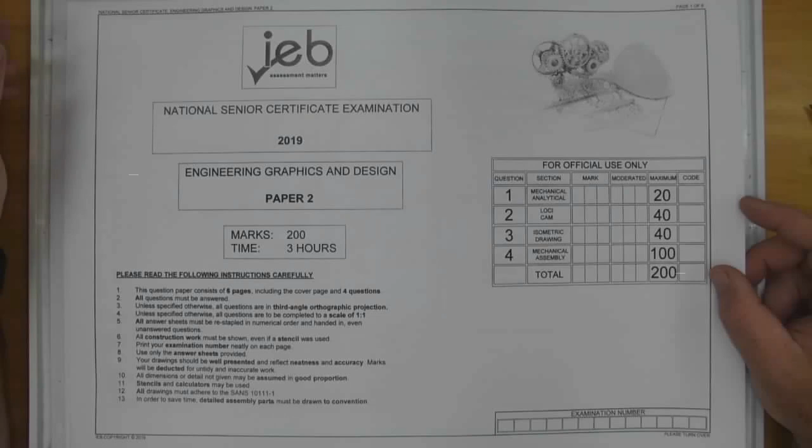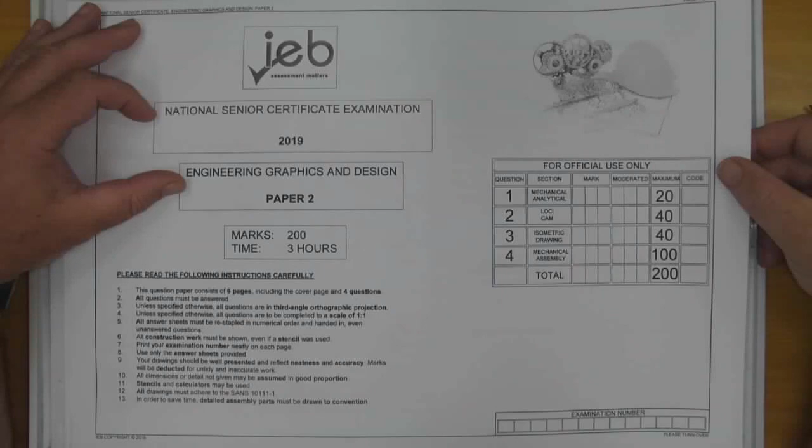Today I'm looking at 2019 IEB paper 2, and I'm going to be looking at the isometric drawing today. With the isometric drawings in 2018, the isometric drawing was a half section, meaning a quarter of the shape was cut away. In 2019, if we take a look at the shape here, we've got a full section.

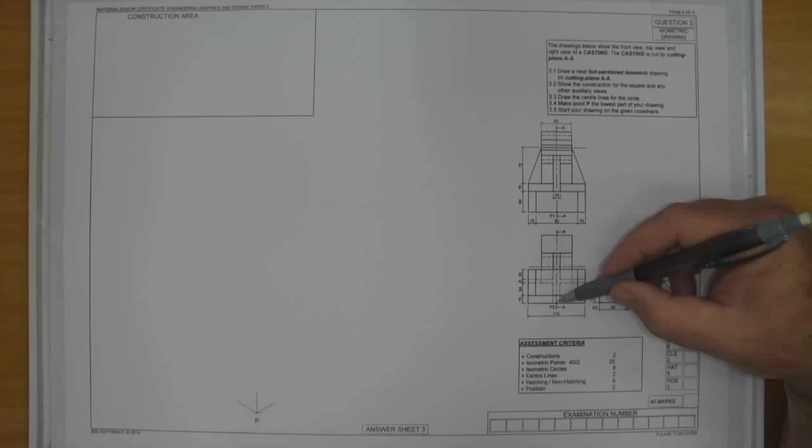What they were doing was alternating and testing your sectioning ability. So over here, if they did a full section in isometric, they alternated in the mechanical assembly, and then they did a half section in the mechanical assembly.

So an important aspect of a mechanical drawing is to be able to do sectional views. It's something that has come up with the new examiner, so it's a full sectioned isometric view. Spend a moment going through the information here, and we'll get started shortly with the constructions.

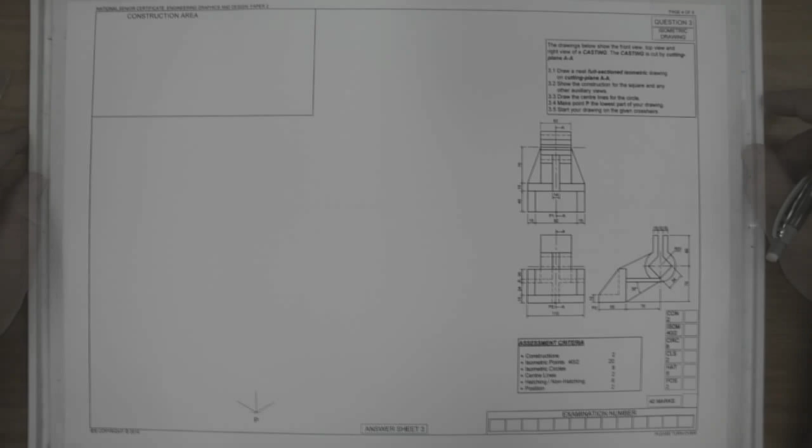The first thing that I like to start with is to get some marks on the board, and for me that's to draw the constructions. In your instructions they've said you've got to show the construction of the square and any other auxiliaries. You're going to probably need to do this one here as well, where we've got this little rib at the bottom of the shape. So that's my first thing.

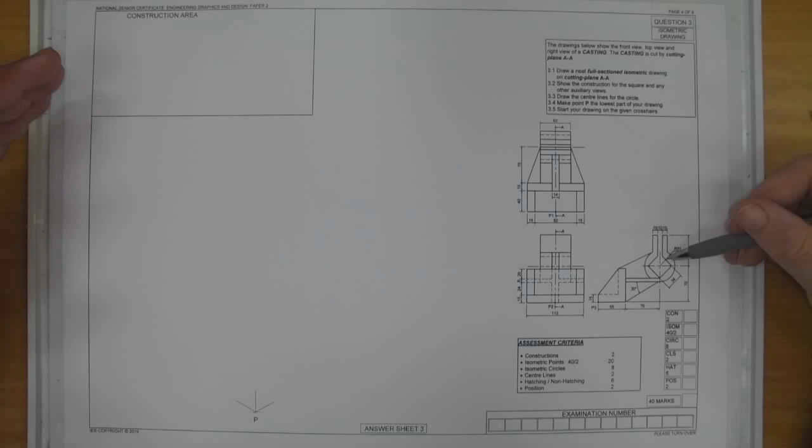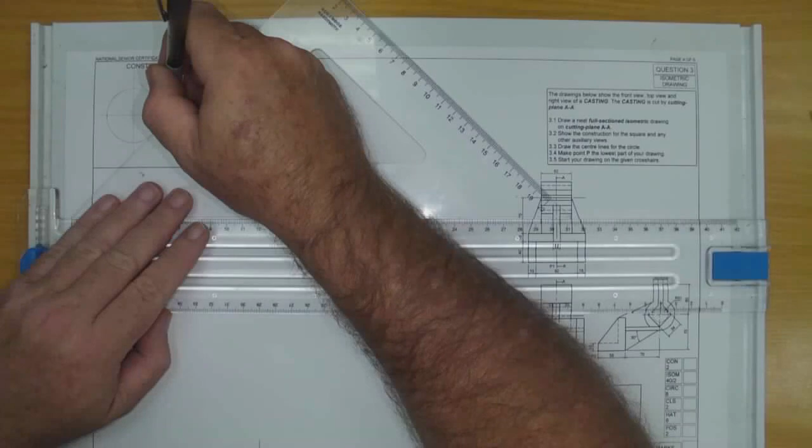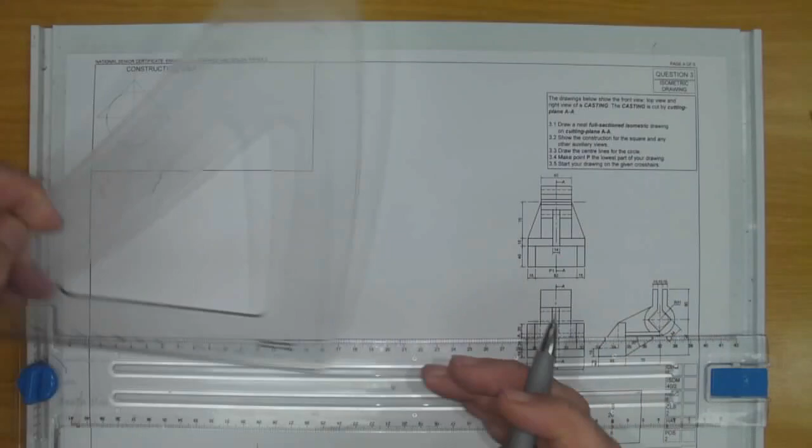They tell me that the square has a distance between the sides of 34. Now you could draw this as a flat square and get the same shape, but generally what happens is if you're going to do this construction, we draw a circle that touches the inside of that. So we'd start by drawing the circle with a radius of 17, diameter of 34, and they've given us this construction area to do that. I'm going to draw that circle with a radius of 17. Here's my circle with that radius, and all I'm going to now do is draw in my diagonals. And there is that construction.

In order to find this height over here, I need to construct this. Well, they've actually given it to me there, so I actually don't think I need to do that construction.

So I'm now ready to start my shape. Now, as we get going, let's remember the following please, that your time allocation needs to be 35 minutes to complete this drawing. Don't spend too much longer than that on this, otherwise you're going to be losing out on time to complete your other drawings.

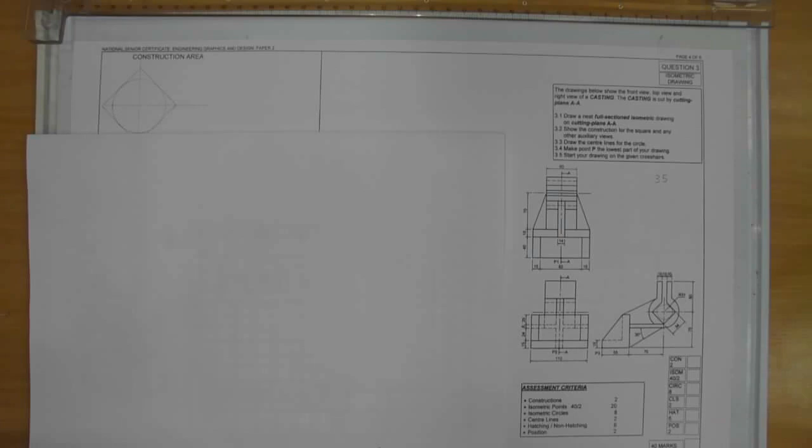A nice thing to do before you get started though would be to make a little sketch, give you an idea of what you think this shape will look like before you get drawing.

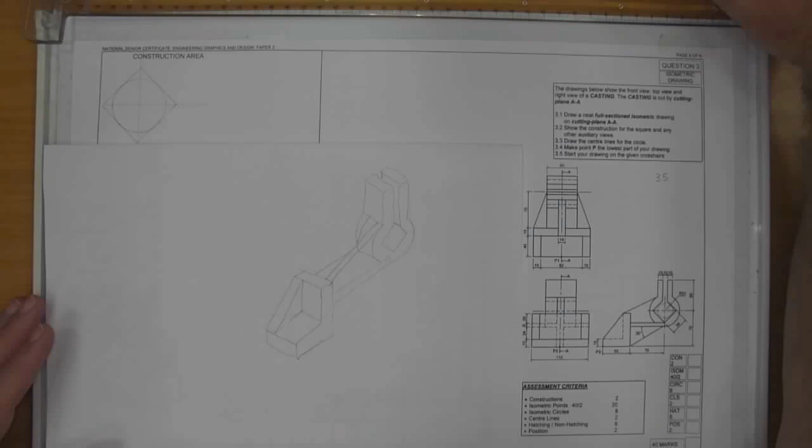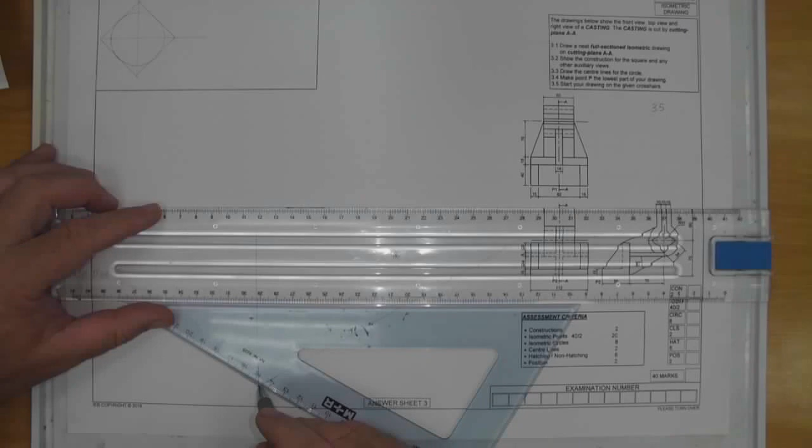The first thing that I like to do on my drawing is to draw an isometric axis and position the start of my shape. They have given us the start point of P, which is at this point over here.

Now, if we're going to mark off our shape, I'm going to look at maybe going and getting this little L shape and then across to where this horizontal little shape goes through there. So I'm going to look at marking off those measurements to start. It's always worthwhile and helps your speed if you could mark off a couple of measurements at the same time. So that was the 55, now I'm marking off the 70. Again, let's try and be accurate with your measurements.

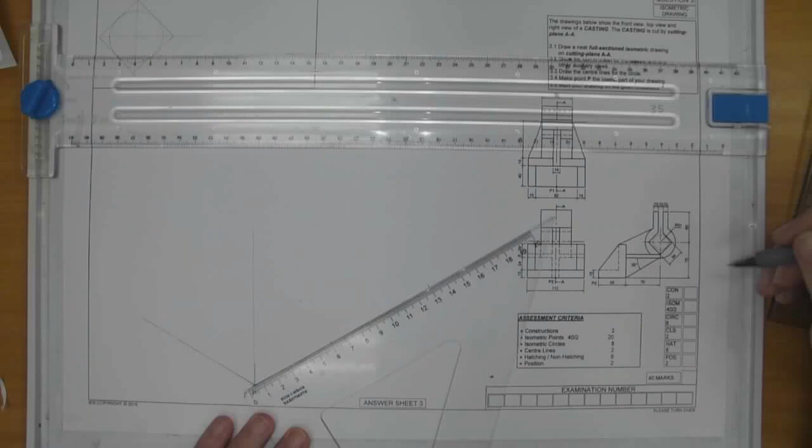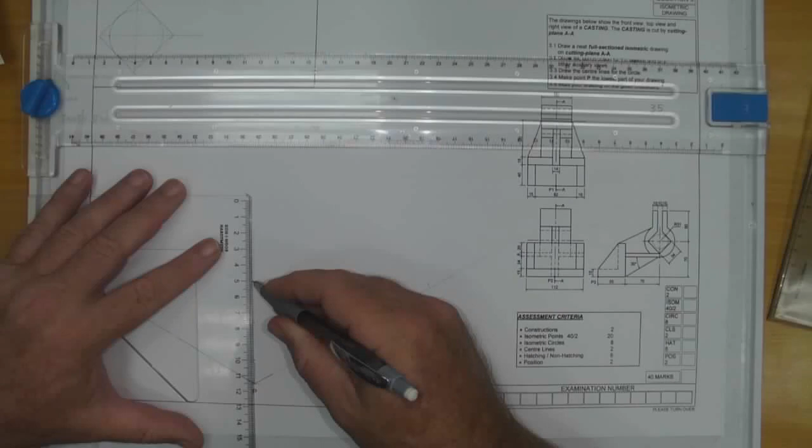Okay, the height measurements I'm looking for here: there's a 15, a 24, a 6, and a 20. So we can mark all those off. So there's my 15, and 24, and 6, and 20. So always try and mark off a few different measurements at the same time. Really helps you with your speed instead of marking off one measurement at a time.

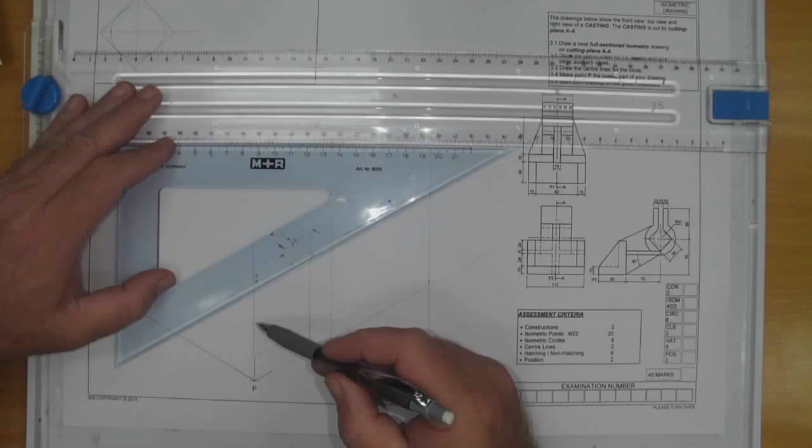These should all be construction lines, your light line, because we don't know what's going to become permanent and what's going to become hidden detail. So very important, your line quality here in your isometric drawing.

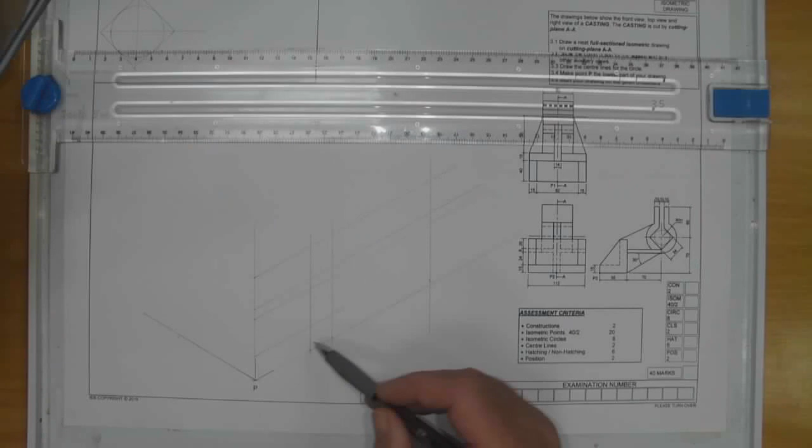So here I can see that little L shape that I've got, and here is this part coming across to the center of where my circle is going to be.

Now if we mark off some measurements, at this point I need the radius, which is 31. Now 31 is quite a random measurement, and the point is they're trying to see if you're able to measure random distances. So please be aware of that.

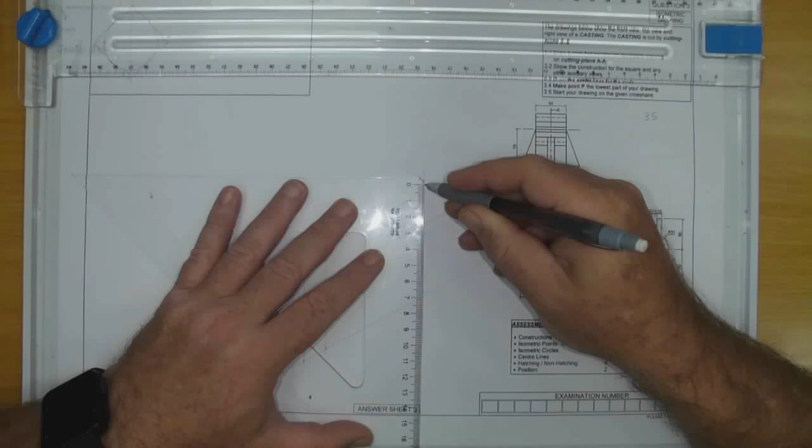They're trying to test your skill of using a ruler correctly. So there's my distance of 31, and I'm going to go up another radius of 31, which gives me the top of my circle. I'm only going to use that later for my square.

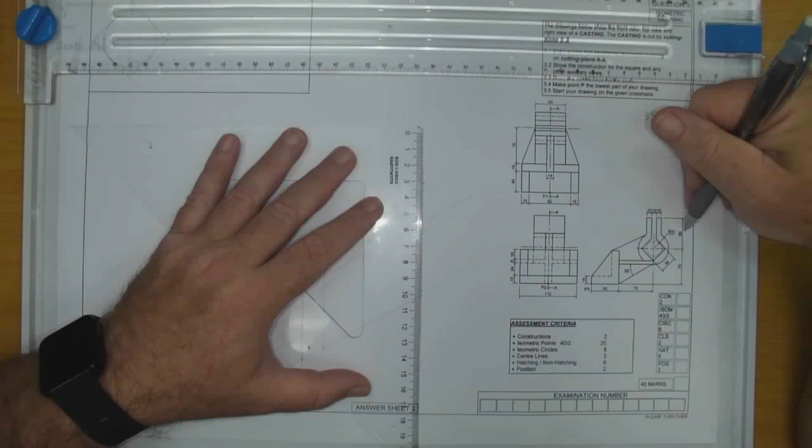They tell me that from that center point it's going to go up a distance of 60. So what I want to do is mark off that distance of 60, which is where I can draw these two little forks at the top.

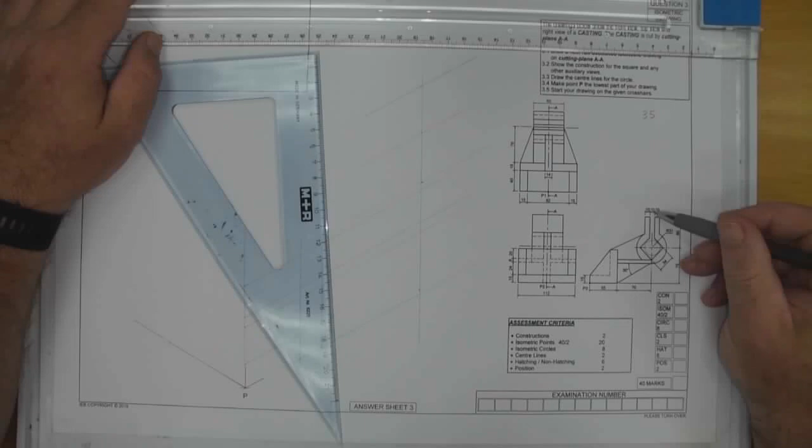Now for these forks, they're telling me that distance is 10 in the middle and 10 on either side. Now if I've got the center here, I'm obviously going to need to mark off 5 on either side, and then a measurement of 10.

Okay, so we've got a few things coming together here, let's go for our circle construction next. For my circle construction, there is the center, that distance of 31 and 31 up, and I've marked off 31 on either side, creating that square.

When I look at the shape now, I look at the distance between the midpoints, and I can tell that this distance here is bigger than that distance, meaning I must draw a big radius arc here and the same on that side.

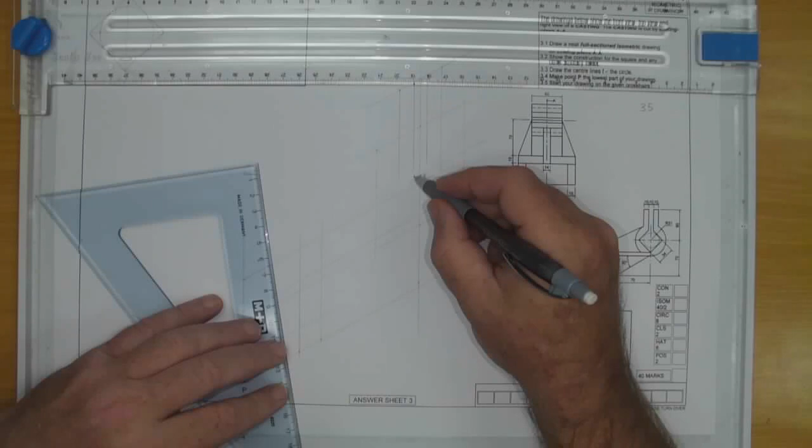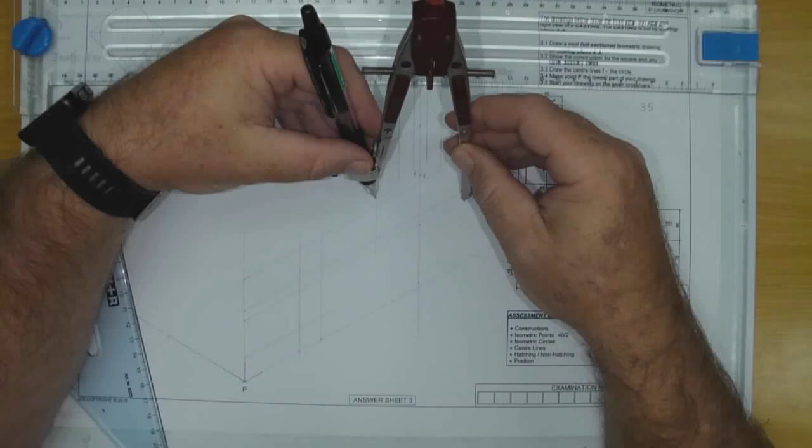So I take my compass, put it in this corner, extend it to the midpoint, check that it's touching both sides, and there's that arc there. Flip my compass around, put it on the other side, again check that it's touching. And there's the big arc.

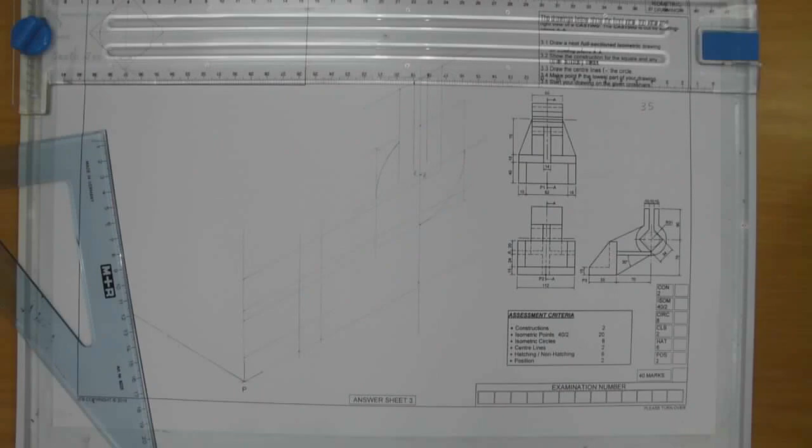To find the small arc, I draw in the diagonal in the small quadrants, and my test for accuracy is that it's going to run through the center of my shape.

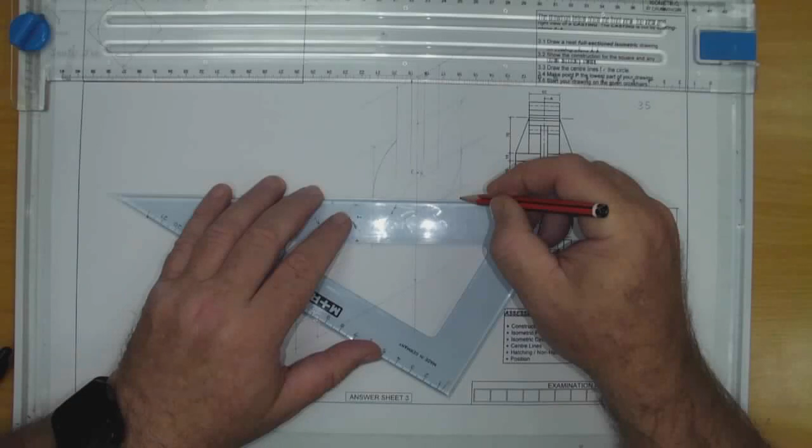Take one of your big arcs and draw it in. So in other words, that's where I put my compass, that's where I extended it to the midpoint, so there I draw that in. There at the intersection gives me this point.

Do the same on the other side, from the center to the midpoint on that side. Where it hits there is the other one. Now this is a small radius, so I stay in this quadrant, put my compass there, extend that, and draw my small arc.

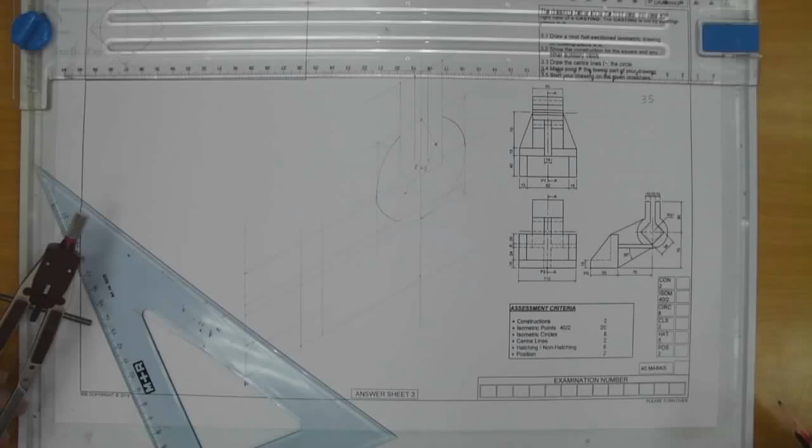So there's that arc at the moment. I'm going to just darken up some of the lines so that I've got an idea of what's happening.

So generally what I like to do is draw my lines in at the same time. These were vertical lines, so I'm going to try and put in as many vertical lines as I can at this stage. I'm not going all the way with this because I haven't worked out where that's going to finish just yet.

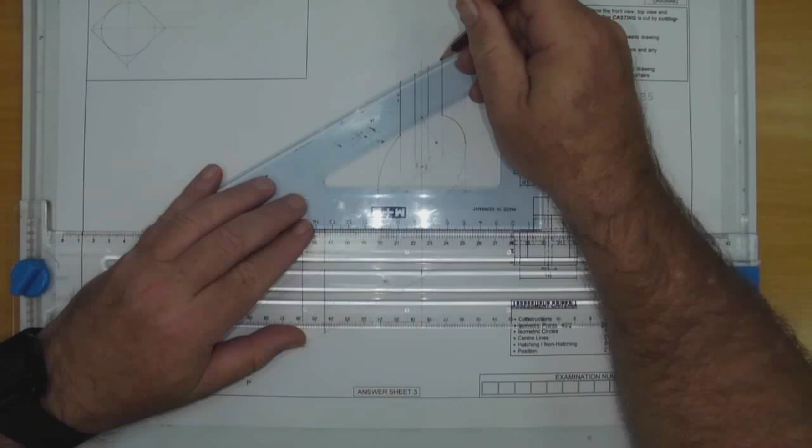There's some of my points. Now I'll do some of my 30-degree lines, again just trying to move down my shape and find the points that I can so long.

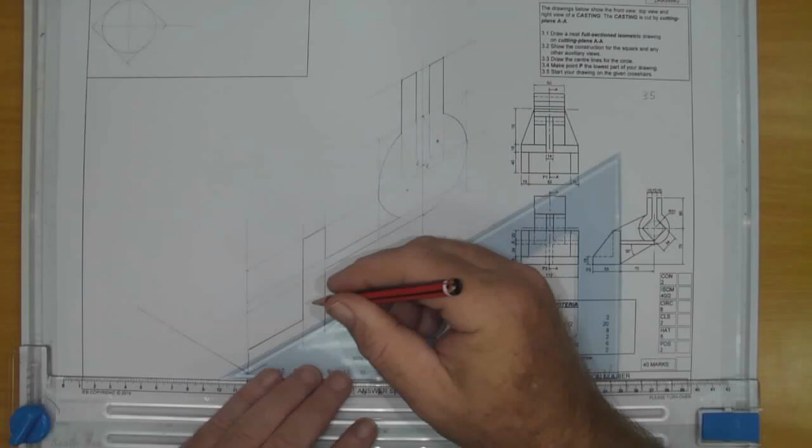Now, at the bottom of this shape, we've got that rib here at the bottom, and the start point of the rib is here, and it finished there, so we could just join this one up at the moment as well.

And so there's some of my shape. Now let's start working off the width dimensions.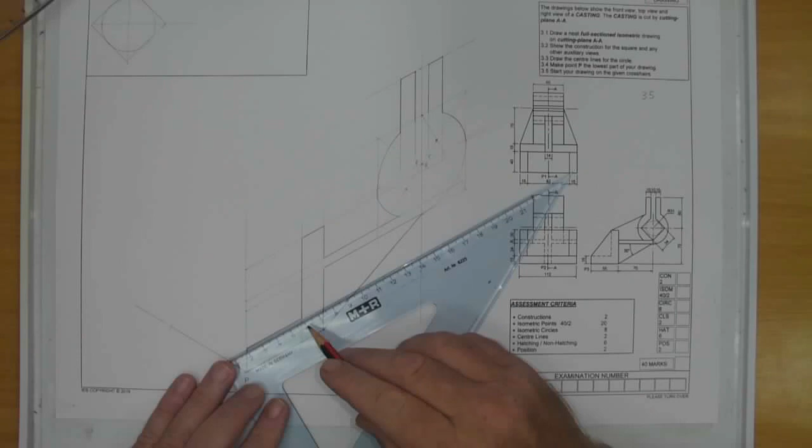It's worthwhile to take a pause in your drawing and check your measurements again. That distance was 40, that distance is 15, I'm happy with that. This distance was 70, yeah, 70. So these distances were 10, 10, 10. Just spend a few seconds rechecking your measurements.

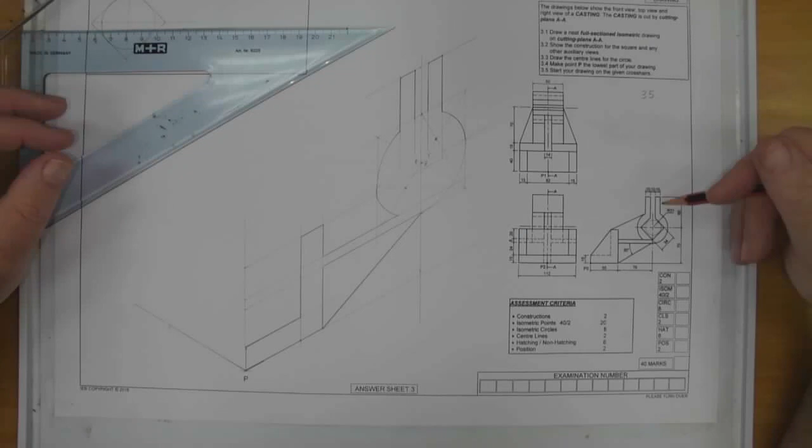To see that they match up with what you've got in your drawing, I'm now going to start projecting my lines across to get my width dimensions. There, I have projected my width dimensions. I know at the top of the shape here I need half of 60, so I need to mark off a distance of 30. And there is my distance of 30. For this part, it's half of 112, so that's 56.

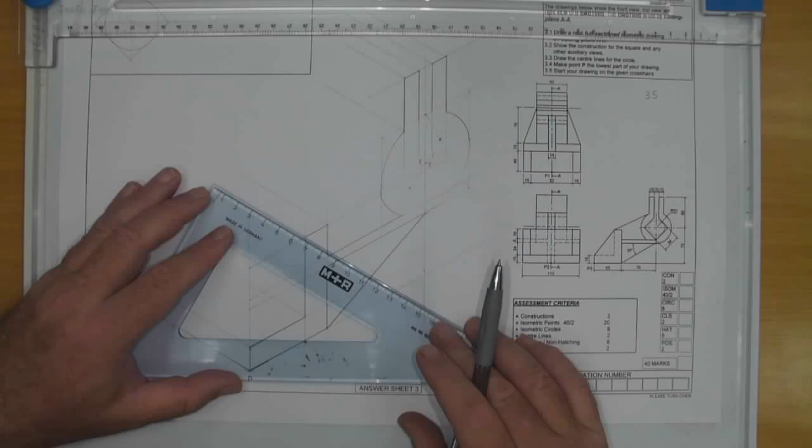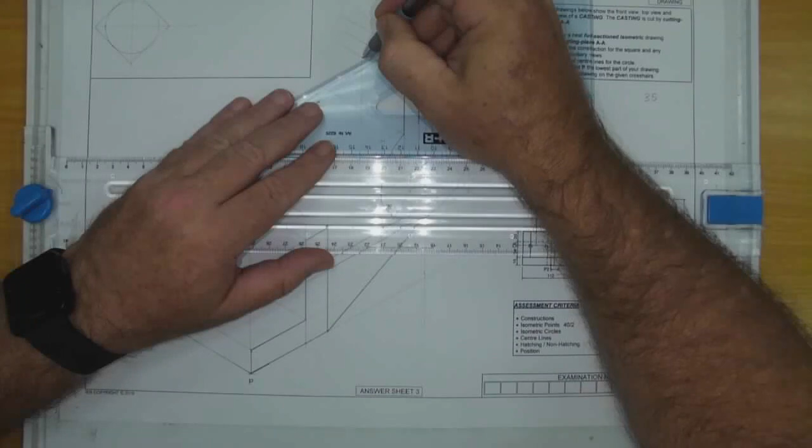Again, a random distance, because they want to see if you're able to measure accurately. Now what I've done is I've just picked a point here and I'm going to project to get the other ones the same over there. Because that's the edge, I'm projecting and projecting. Okay, I cheated on that one. Draw it in.

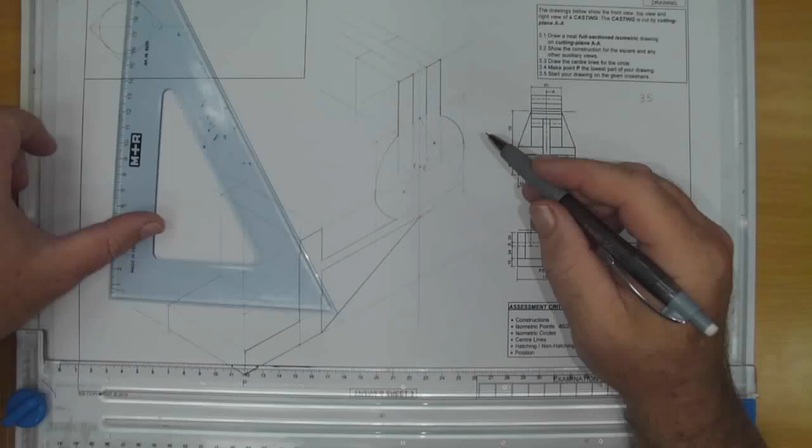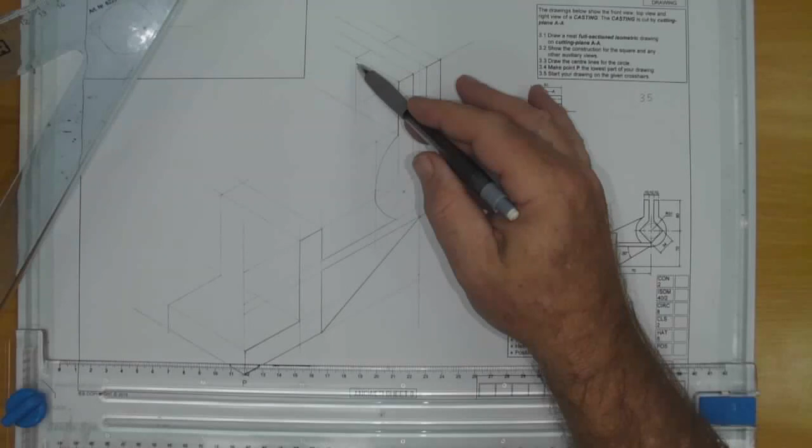So by projecting, I'm able to find where the edges are of the shape. Now you'll notice that I haven't put in my square just yet. I'm leaving it for the end. I'm trying to make sure I can get the easy marks by finding just the edges of these, which I think are easier than working out where your square is going to be in this shape. That's the only reason I haven't done my square. I'm trying to get the marks for these points which are easier to find.

Okay, I'm going to put in this rib on this side. So here is this edge coming down. And then we can join up the start point to the end point, and that is that edge of that rib there. And again, I'm just darkening up my lines a little bit now, to see what is visible.

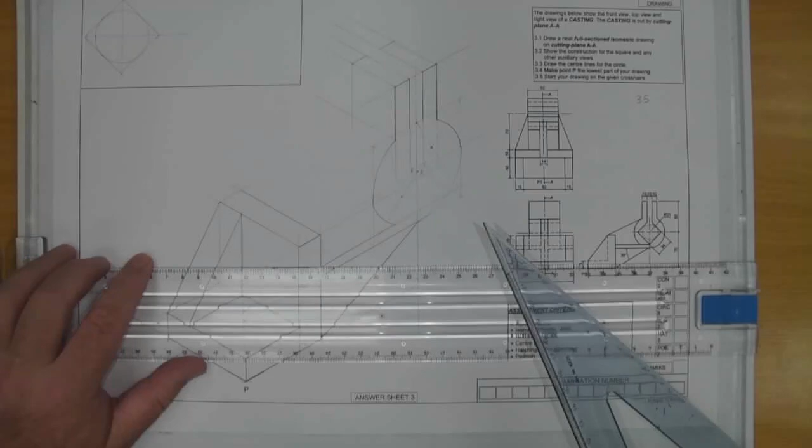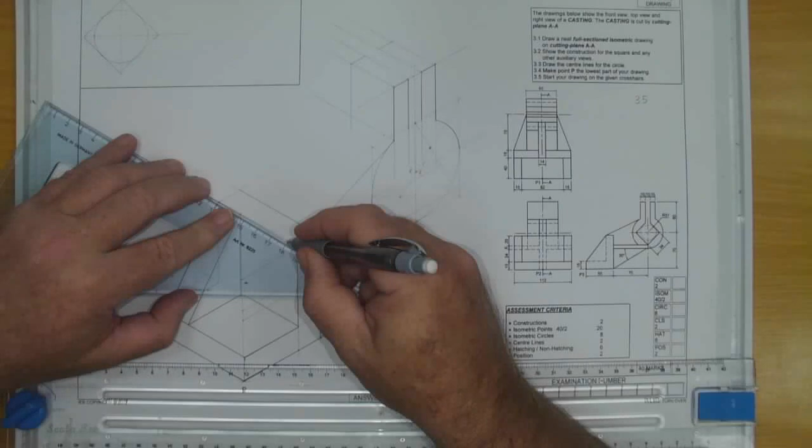Now on this side we've got that little rib coming around, so we're trying to find the tangent that goes from this point here to that edge there. And there is that little aspect there. Now this rib has got a thickness of 14, again a bit of a random number. I'm marking off 7 from that point, and I'm going to mark off 7 on this side, and that's going to give me this edge for that rib.

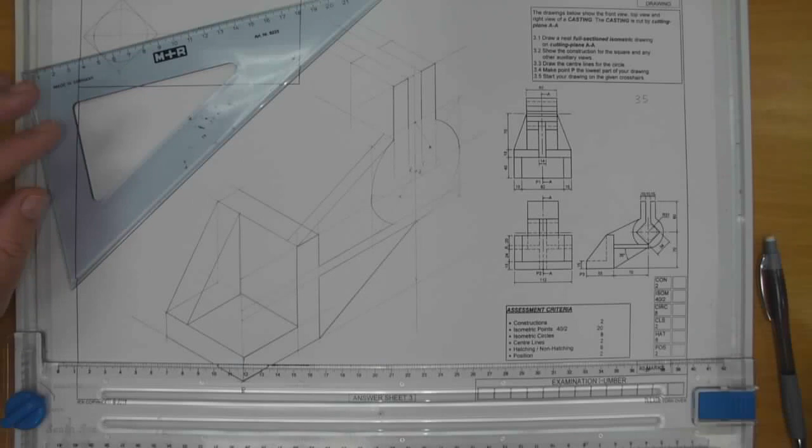So what's left for me to do is find where the back end of this shape is, and then let's put in that square. I'm going to find this back end of this corner now. Remember, this part sticking out there was this narrow part, so it's not the same thickness. It is tapering, so here is wide up against this shape, and it then narrows to come and touch where it is that distance at the point here.

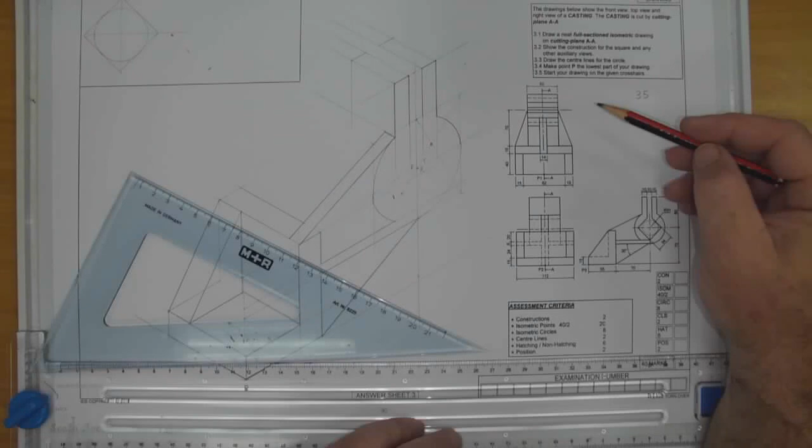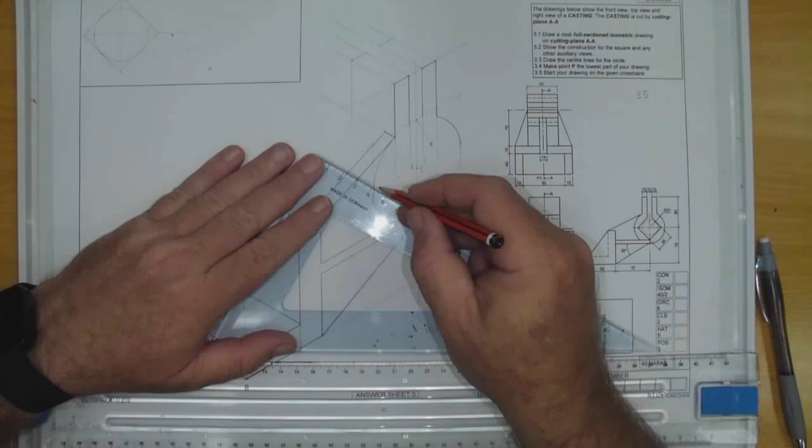So what we can do is the following. We know that it's going to be touching in line with the center here. So here was the center. I'm going to just extend that line back. And I need to mark off half of 60. There was my distance of 30, just where the circle is.

On this side, we're going to extend this edge where our distance was half of 112, so 56. And there was that point there. So if we're looking at the point, it's going to be going from here to this edge here. And that's that little aspect that we're going to see there.

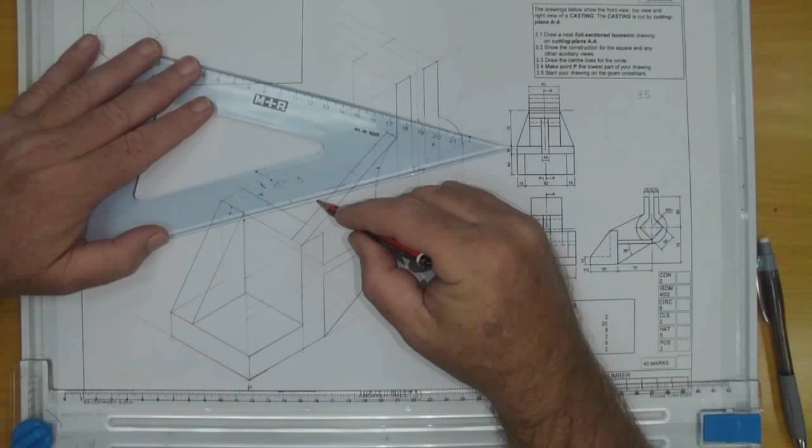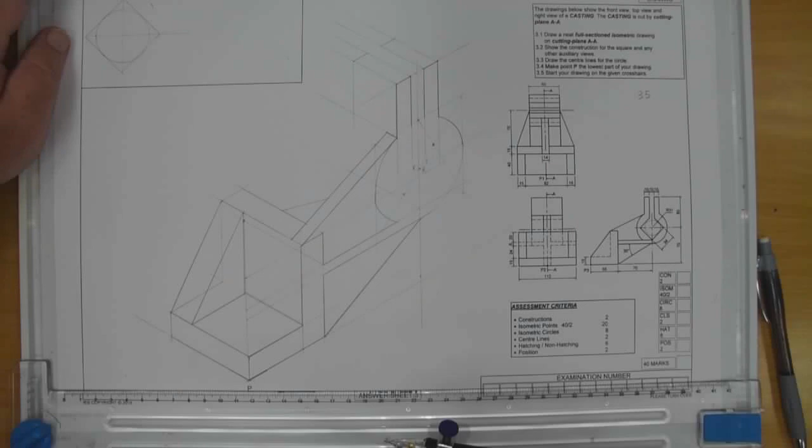Okay, let's get our square put in. So what I'm going to do is I've got a center line here. I'm going to be using that same measurement of that center line. So what I'm going to do here is take the distance from the center to the point, which should be all on the same point because it's a square.

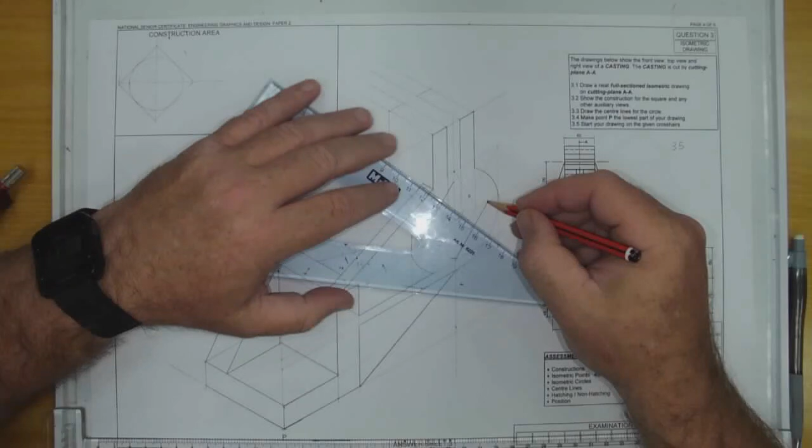I come and put it in the center of my shape here, mark off on my 30-degree and my vertical line, and that's going to give me my points for that square. Join them up. Now again, these sides should be parallel. If they're not parallel, check please, you might have a problem.

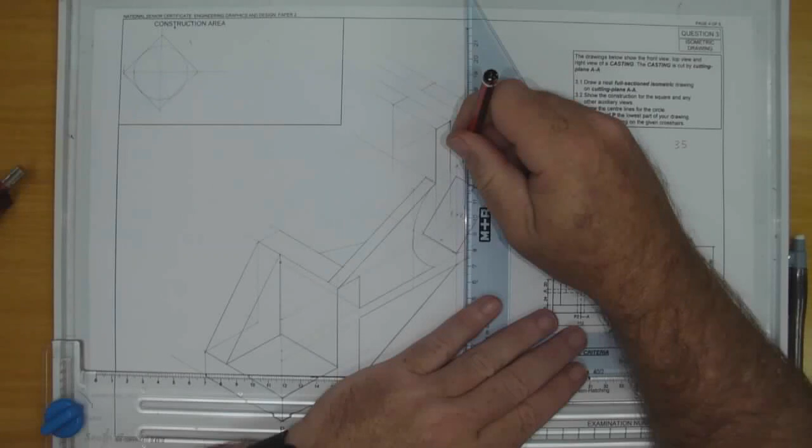Now that should fall on the 30-degree line, so we're not going to see any other points going in. I shouldn't have drawn that line all the way there because it's going to stop at the extension of this line. Let me just fix that up there. And so there are those points. This edge we will see because it's open, the window, so that'll extend like that. Let's put in these edges here.

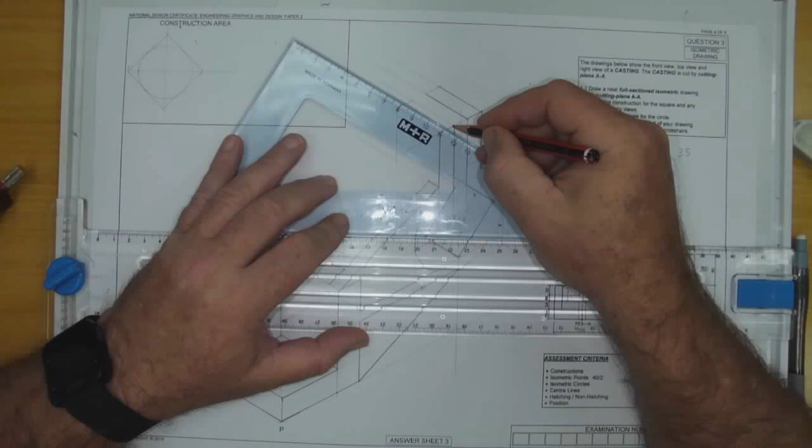Again, this is open, so I'm going to see a little window, which is going to give me this little edge here.

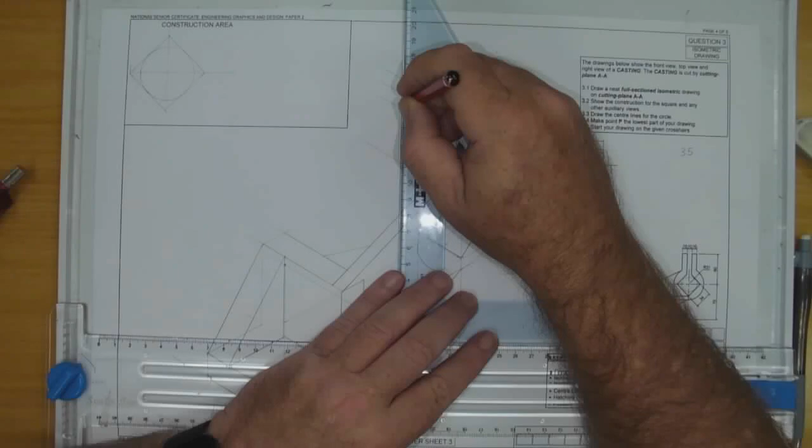Now what I need to try and find is this little arc at the back here. I know the center point of my arc was here, and I needed to mark off a width dimension of 30, which gives me the center of my shape.

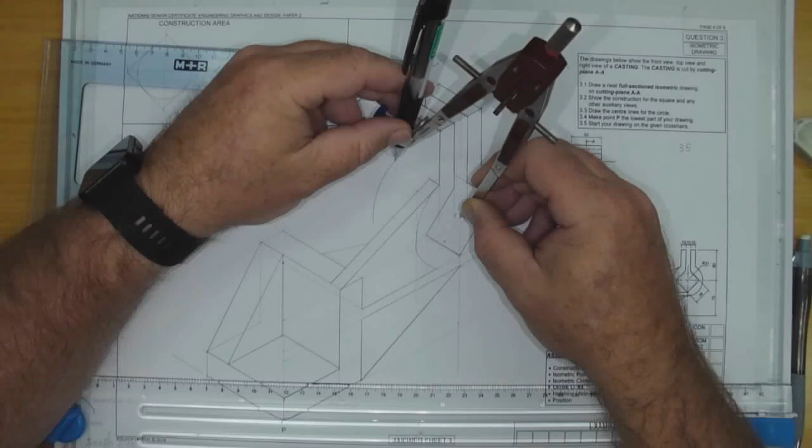What I'll do is take the same radius I used to draw my big arc, set that up, check it's correct, move it across here, and have this arc coming around, finishing at that point over there.

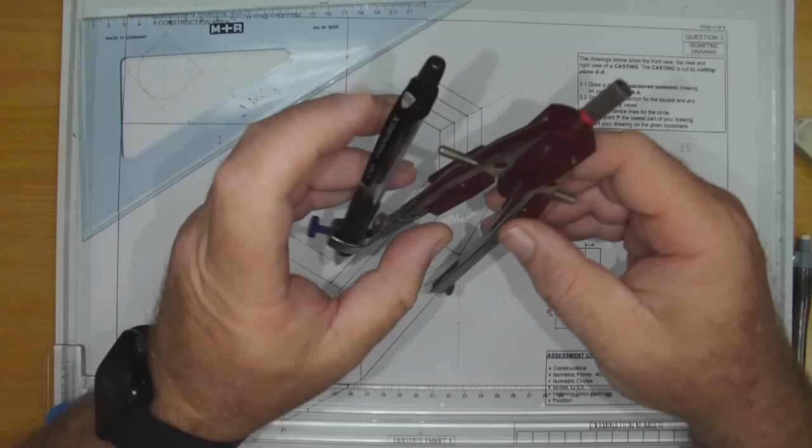Then we need to use the bottom little arc. Again we're going to take this distance of 30, take the radius of my small arc, come and position it here, and finish off that little bit of the arc.

You might see a tiny little aspect here of a line going back.

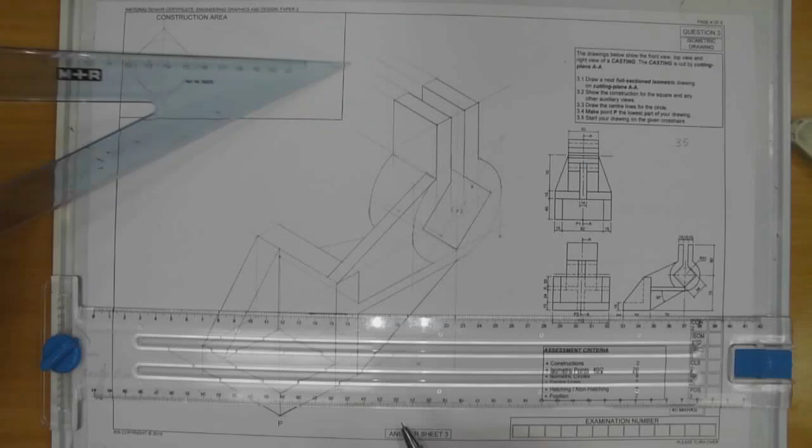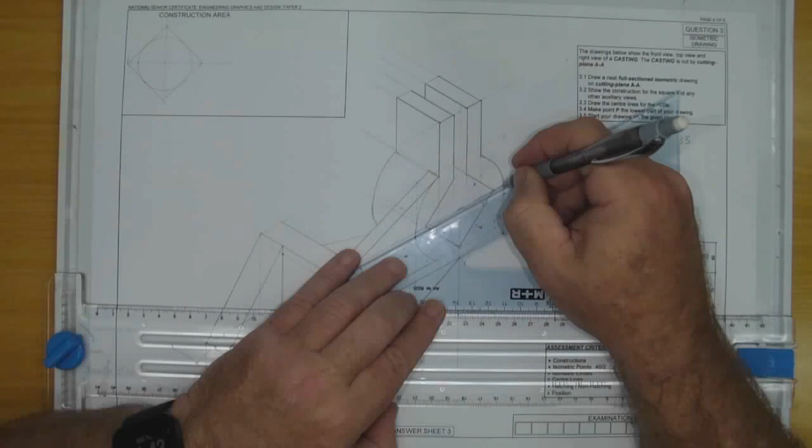Now just to put in my center line, I like to have the short dash in the middle. Short dash, space, long dash, going past the edge of the circle. Short dash in the middle, space, long dash extending past the edge.

Because that circle's traveling through there, on this axis we should also have the center line running in that direction as well.

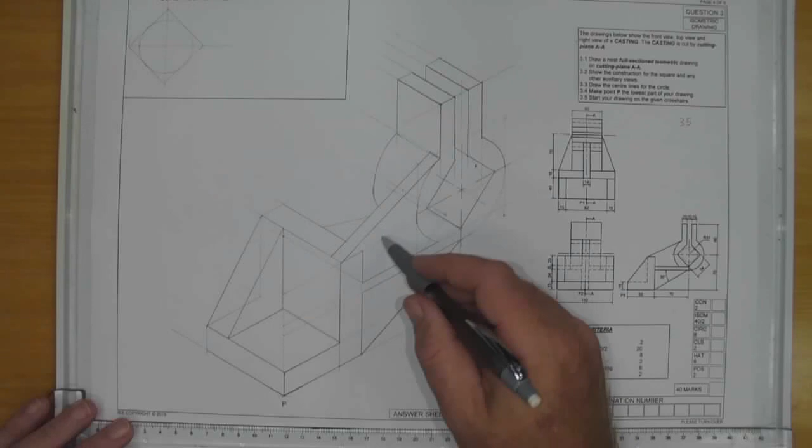Now we've got to put in the hatching. So the main parts are here, going through there, and this edge of the shape. This is a rib that doesn't get hatched, and that is a rib that doesn't get hatched.

Please remember your hatching angle is 60 degrees. I'm hatching at 1 centimeter spaces, 10 millimeters.

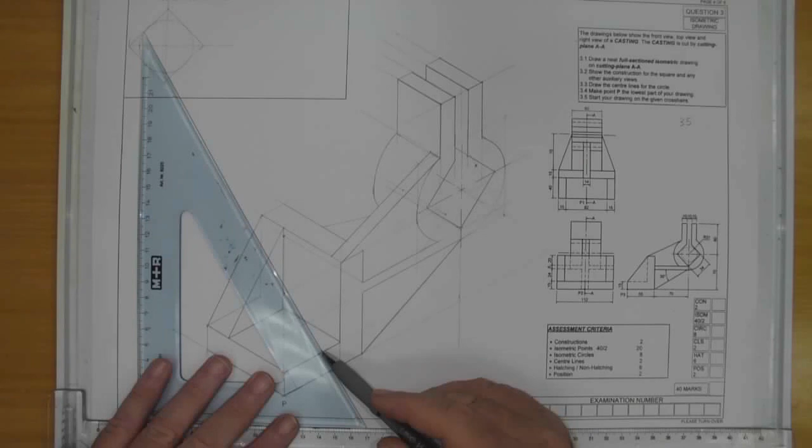Remember that your hatching should be a B line, which is lighter than your outline, so make sure we can distinguish between the different line types that you have.

And there is my hatching.

So if we check, we've done constructions. They've asked for 2 - not sure which 2 they were looking for, as that to me is the only one, and these ones join up.

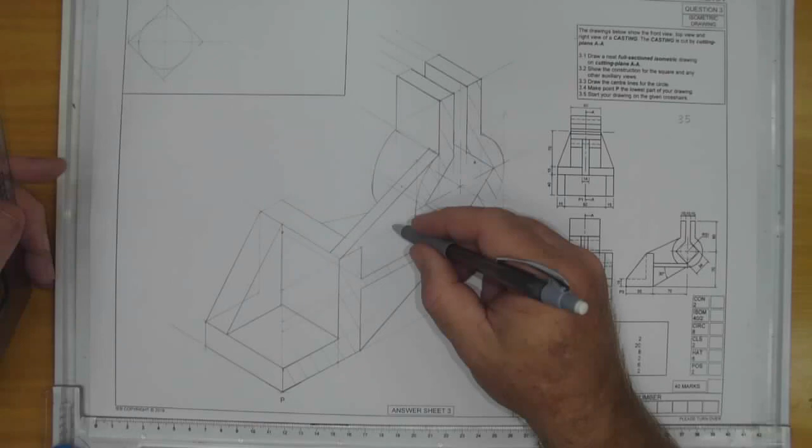Center lines - there's our one center line, there's our other center line. Hatching and non-hatching, so they're probably 1, 2, 3, 4, 5, 6. Maybe they're half marks because this wouldn't be hatched and that wouldn't be hatched.

Position, I think we've got the position correct from where point P is. So the grade 12s, this is the isometric of the 2019 paper.

A full section of this casting.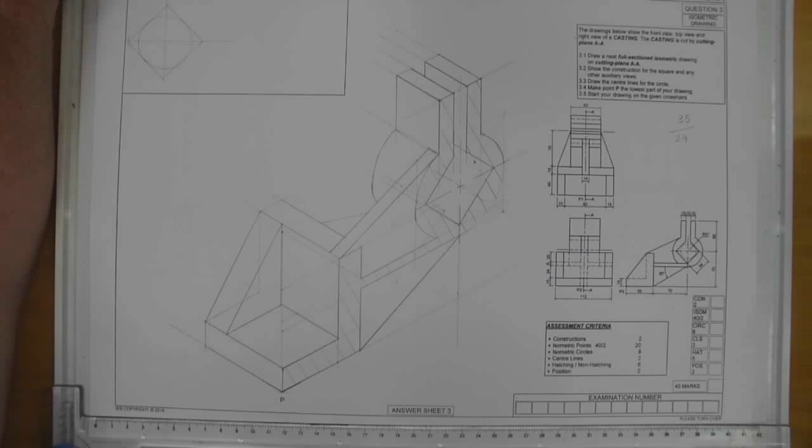My drawing time has been 29 minutes, so that's under my time of 35. I hope you're also under 35 minutes.

Hello grade 12s, my apologies - this looks very close to that center but that's obviously not, and that is the construction for the second one. So I needed a height here of 15 and 24.

What I'm going to do is draw a random vertical line, random horizontal line, and mark off that height of 15 plus 24, giving me a height of 39.

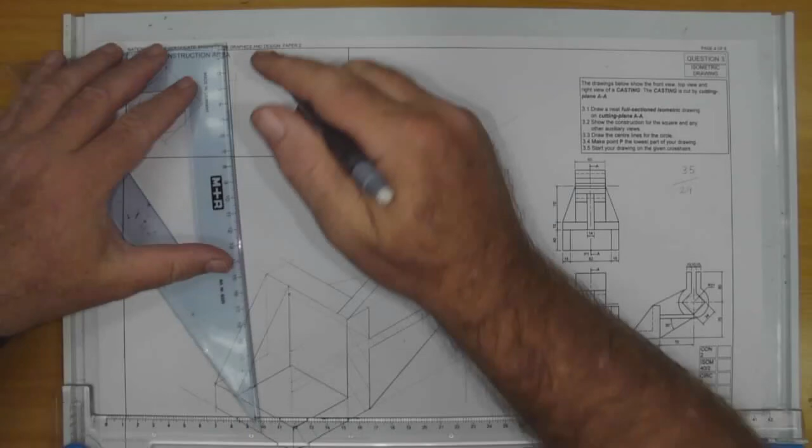There's my height of 39, and now I draw in that 30 degree line.

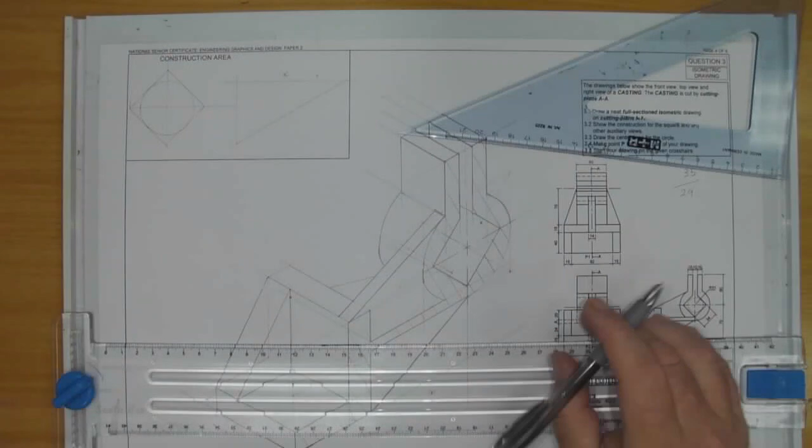That now gives us this X value, which we should take to draw this rib at the bottom of the casting.

There it is there. And okay, I mean that's...

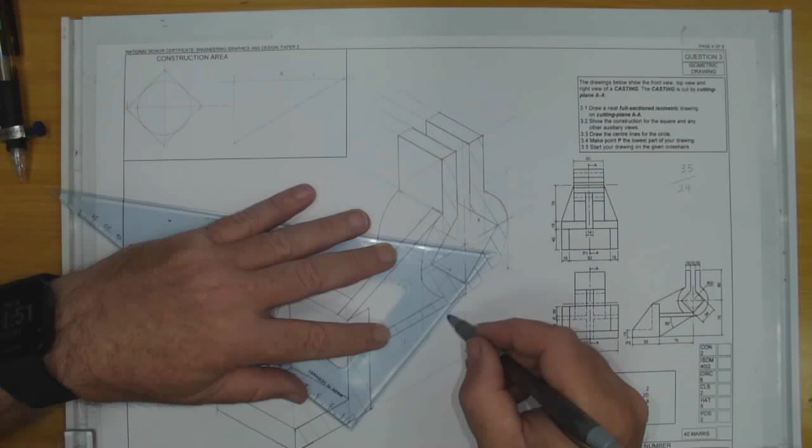Out by a tiny little bit. Alright, we're going to fix that up. So it was a little bit shorter, maybe 2 mils shorter. And there is where it should be.

So my apologies about that one. Hopefully you didn't make the same mistake that I did.